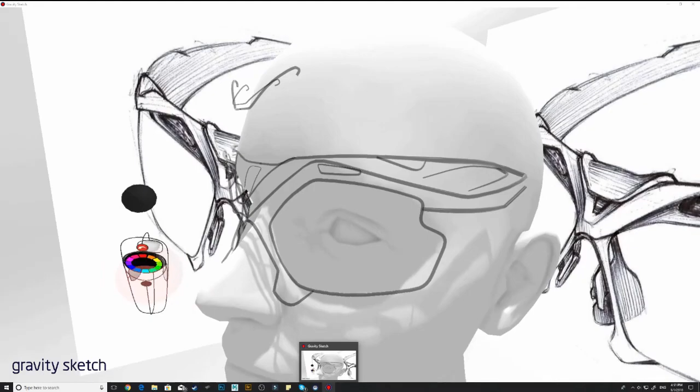As you can see, we've got the lines pretty far along. Definitely there's some details which I'm going to finish up in this video. So this is about 25-26 minutes of me finishing up these lines, tuning everything, and then pulling the first one or two surfaces over the main parts of the glasses. In fact, I start the surfaces in the same spot that I started the line drawing, just because I'm excited to see those surfaces.

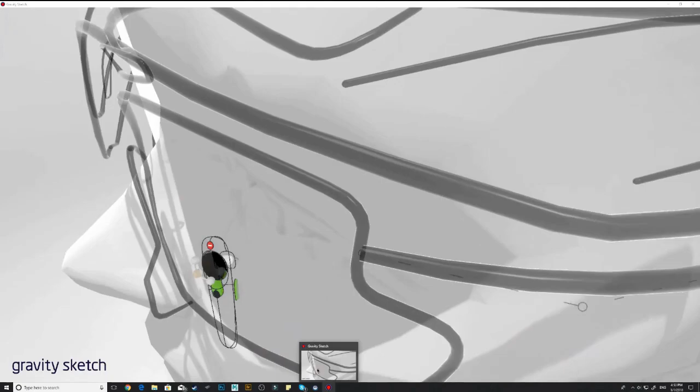I'll pop back in during the video to speak about a few interesting points, like matching surfaces, creating surface continuity in a Gravity Sketch model, and also some global proportion changes. I tune the overall shape of the glasses. I've been working on the details for a couple hours, and I need to go back and have a look at them, then tune them. But I talk about that later in the video, so cue the music, sit back, relax, and enjoy.

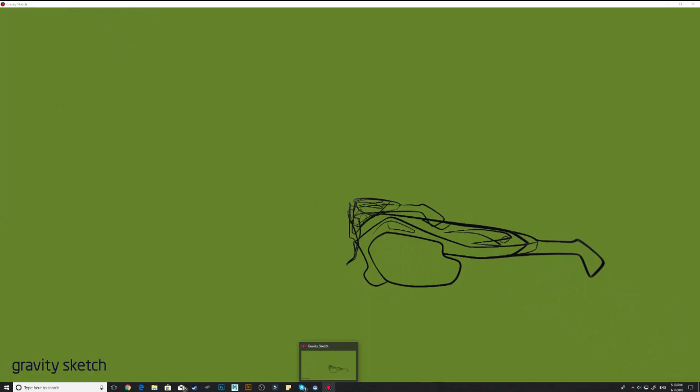So we've reached the point now where I'm checking the overall proportions, as I mentioned before. I've been spending a lot of time focused on details, and you can see the glasses have sort of drifted off the head a bit. The lenses seem to be tipped out a bit, like buck teeth.

People have a pretty strong sense of proportion, even non-designers or people who have no experience building eyewear, or anything that goes on the human body, or that the human body has to fit into. People can sense when proportions are off, if eyewear is too wide, if lenses are too small, etc.

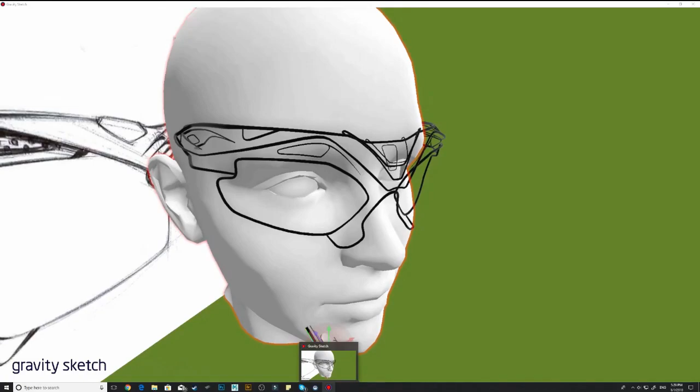So I've done a lot of work on the lines and details, so now I'm just rechecking my proportions on the head to make sure my gut feeling says yeah, these look like the right shape, the right size. And then I jump right back in and continue adding some detail.

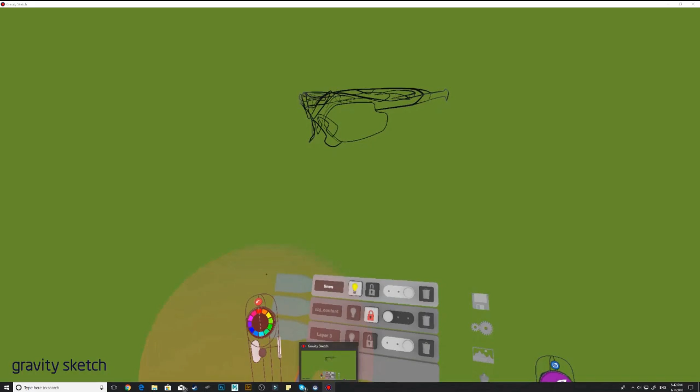So here comes the exciting part. I'm actually going to start pulling surfaces over this line drawing. We spent a couple of hours getting the forms in, roughing out the proportions. I've even indicated some lens curvature.

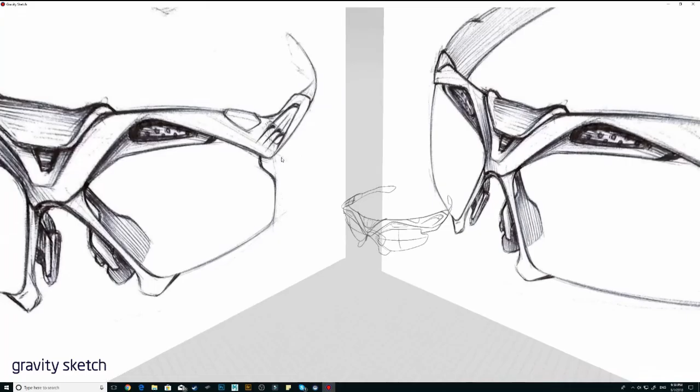I'm not actually going to try and build lenses in Gravity Sketch. The geometry is pretty perfect in lenses, it's kind of the most critical part of eyewear - distance to the eyes, curvature, etc. That's something I'll build in a more precise model-making software. Once I can do Boolean operations and cut stuff out of other surfaces, once I can do that in Gravity Sketch, then I'll put lenses in.

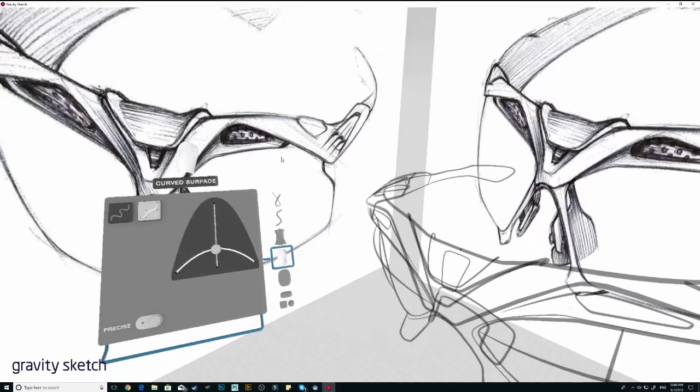But here I am setting up my surface tension - that's the tool you see on the left, curved surface. And then I realized this environment looks a little bit too sterile to start pulling surfaces, and frankly I'm excited to put this main surface on.

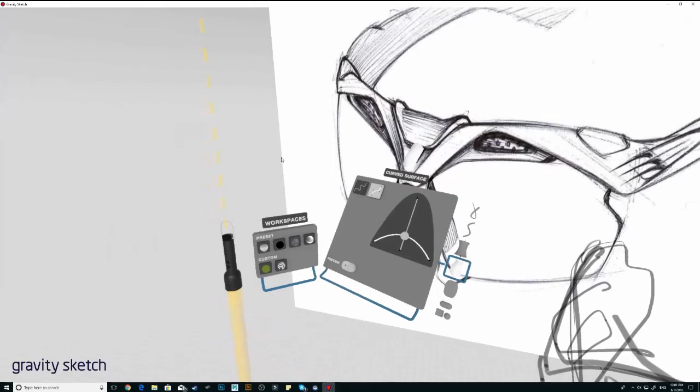So what I do, and this is one of the things about Gravity Sketch that I really like, is I go ahead and create an environment that's more of an illustration. I pull out my environment tool here, and I'm picking a background color that I had in my head, and a surface color that I had in my head when I did the ballpoint pen sketch. So my key sketch, the emotion from it, is something I can quite literally bring over into Gravity Sketch, and that's just an invaluable tool.

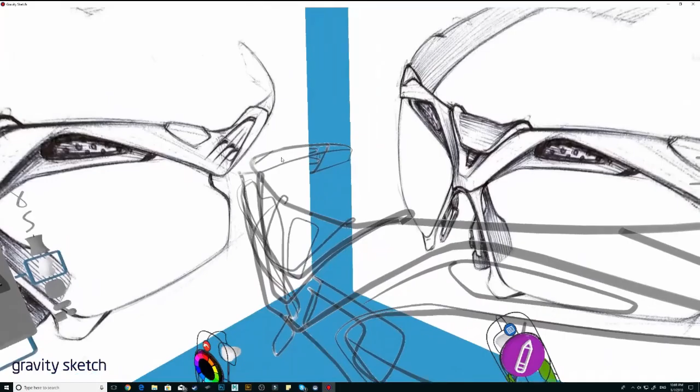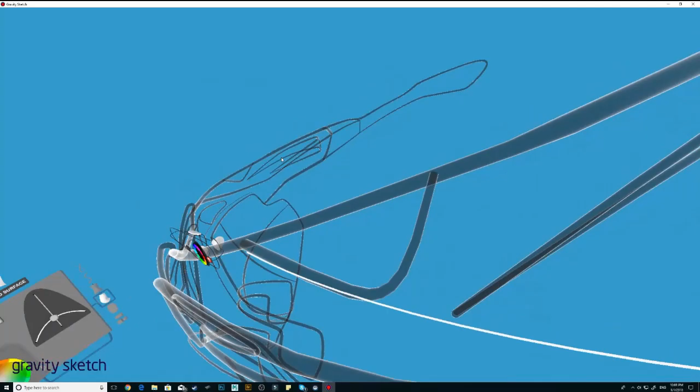I find 3D modeling can become very clinical and cold, and the whole point is to create an emotional product, an emotional design. So I've created a blue background, which I had in my head like I said when I did the key sketch, and I jump right in here and start roughing in my first surface.

And once again, you'll see the first surface I'm building is based on the first lines I drew, this first eyebrow shape. It's because I'm excited to see the surface, excited to see the highlights and how they add character to the wearer's face and a little bit of drama.

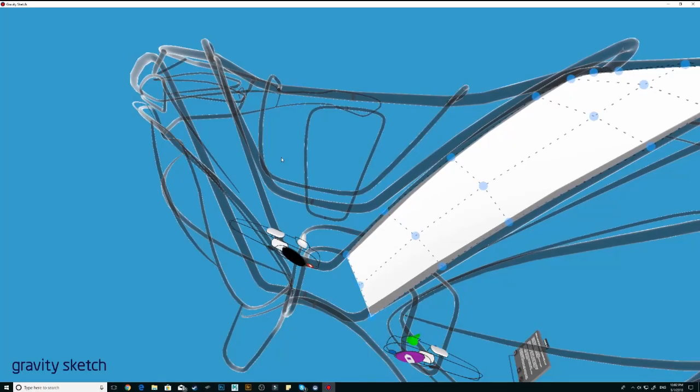You have to assume some background in 3D modeling to understand what I'm doing with the points - I'm not just placing these randomly. I'm trying to create a flow of control points, the minimum number necessary to create the surfaces. That also determines when I'll build another surface, because I don't want to bunch control points up in corners or over the surface - that creates funky surfaces that give ripply highlights and bad reflections.

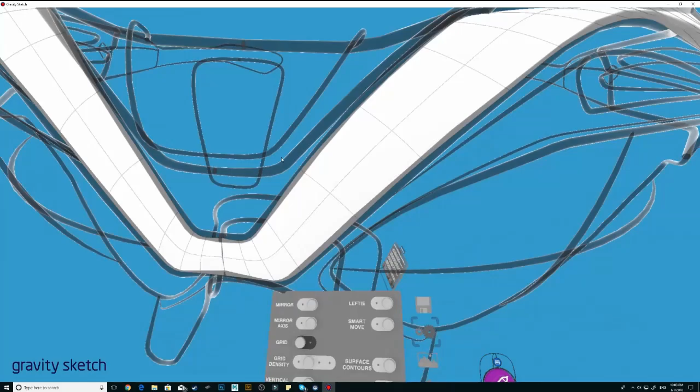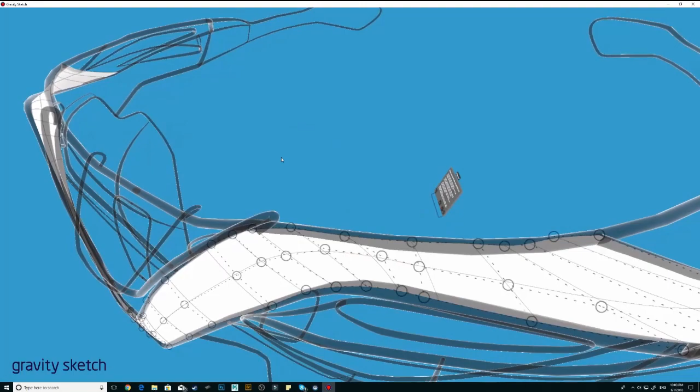So I've laid that surface in, and now I turn the control points on, and I can see my control points are not in clean rows or equal steps from one another. So that's what I'm doing here, trying to apply some good model-making discipline - something I learned from Alias, building surfaces there. You can see it's very similar to pulling the lines: you rough something in, then spend time tuning it up.

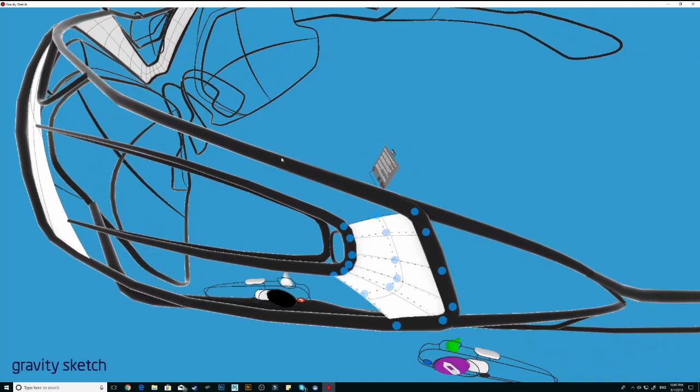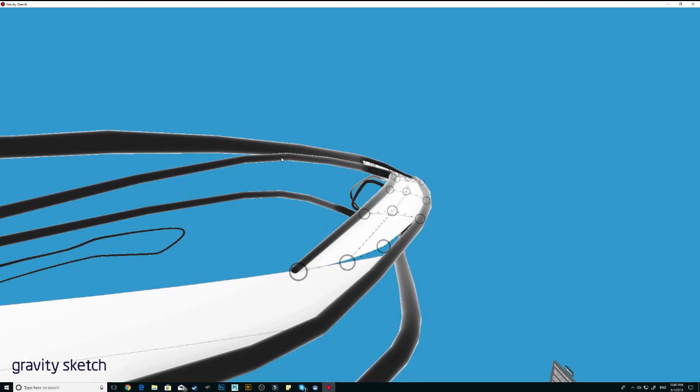So here's an interesting point. I'm bringing two surfaces together, and in a more hardcore surfacing model-making application, this point where the surfaces are supposed to flow together - if a highlight or reflection went across this junction, you wouldn't notice it. In Gravity Sketch, I don't have those tools yet to snap surface continuity.

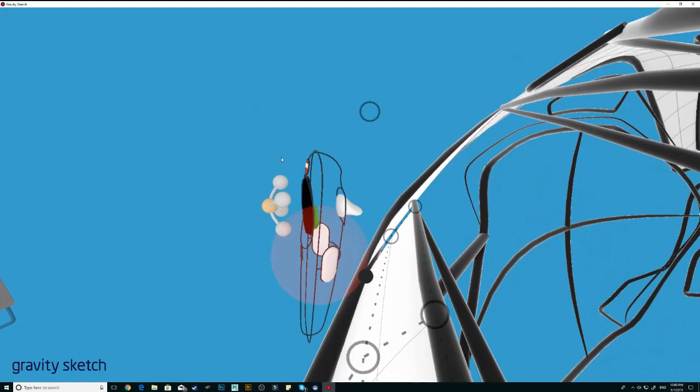They do have some really cool new zebra stripe shaders that show you how light flows along the surfaces, but you can see I'm just doing it manually here. Maybe there's a workaround for this that I don't know yet - perhaps I could snap those control points to one another, and that might help connect two surfaces like this. But for now, that's sort of a challenge.

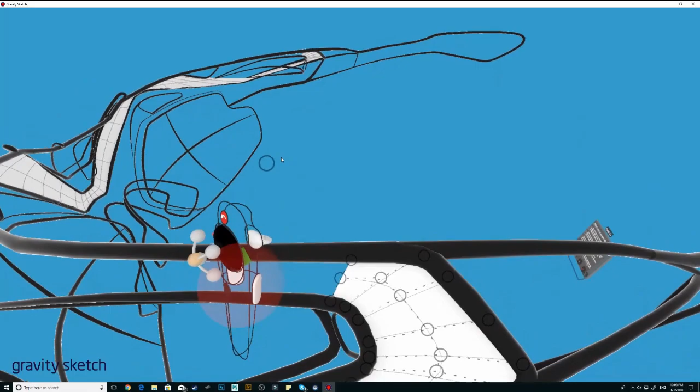Here I am extending that surface out, again using one of the new features where I can grab an entire row of control points. Nice new feature - you can do U direction row. I don't know what that U stands for, but you can also do V direction row, so rows across or rows along the surface.

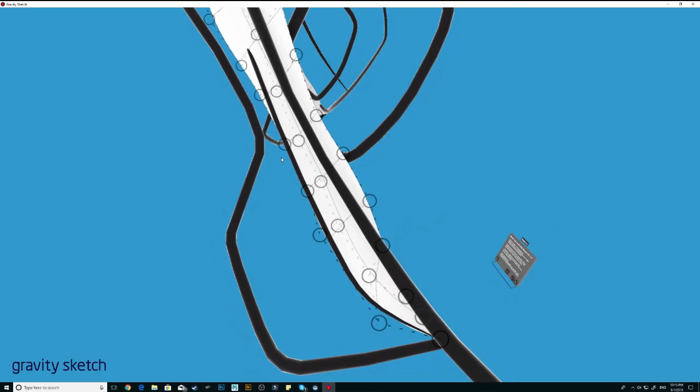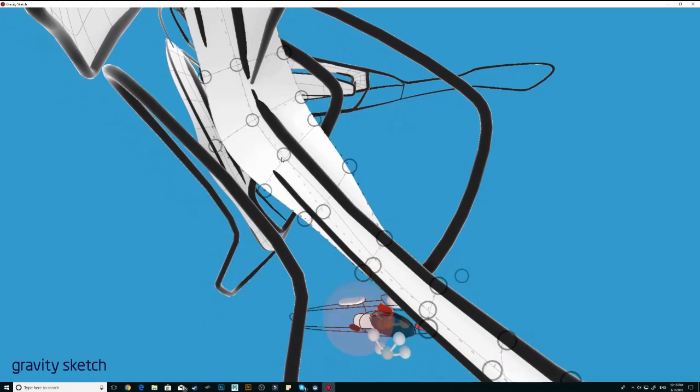So we've reached the end of part 2. You can see we've started pulling surfaces onto our line drawing, and that's what I'll continue with in part 3, which I'll upload in a couple of days. Hope you've enjoyed it this far, and once again, thanks a lot for watching.